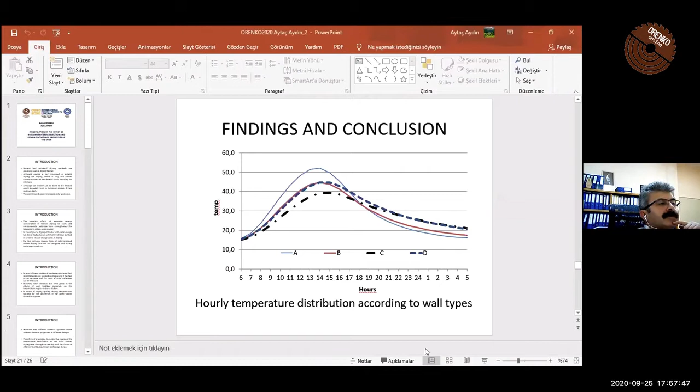Hi everybody. I have two papers. One of them is investigation of the effect of building material selection and design on thermal properties of the oven.

Natural and technical drying methods are generally used in drying timber. Although energy is not consumed in natural drying, the drying period is long and timber cannot be dried to the desired result humidity for interiors. Although the lumber can be dried to the desired result humidity level in technical drying, costs are high. The energy used causes environmental problems.

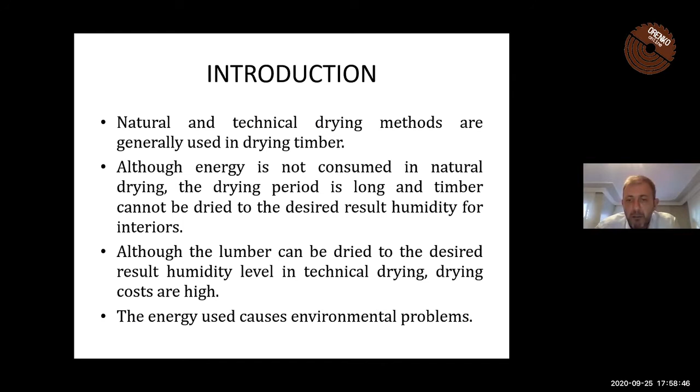The negative effects of intensive energy consumption in timber drying on cost and environmental pollution have strengthened the tendency to utilize solar energy. In recent years, drying of timber with solar energy has been studied as an alternative drying method in order to reduce energy costs in drying.

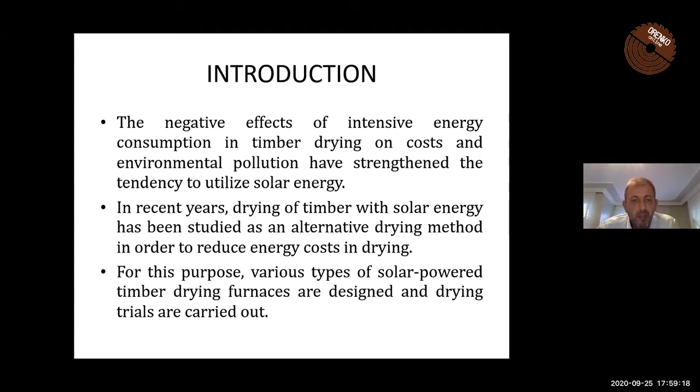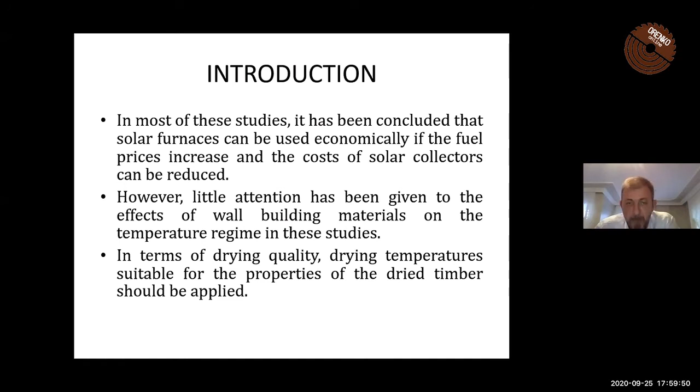For this purpose, various types of solar-powered timber drying furnaces are designed and drying trials are carried out. In most of these studies, it has been concluded that solar furnaces can be used economically if fuel prices increase and the cost of solar collectors can be reduced. However, little attention has been given to the effect of wall building materials on the temperature regime in these studies. In terms of drying quality, drying temperatures suitable for the properties of the dried timber should be applied. Materials with different thermal capacities create different thermal properties in different designs.

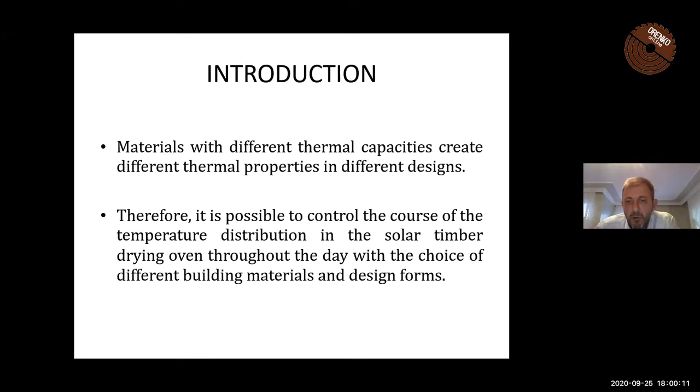Therefore, it is possible to control the course of the temperature distribution in the solar timber drying oven throughout the day with the choice of different building materials and design forms. In solar furnaces, the temperature varies according to solar energy values and shows significant differences throughout the day. During the sunbathing period, the temperature first rises, usually decreases after reaching the maximum value between 12 and 14. The width of the hourly temperature change interval negatively affects the drying time and quality.

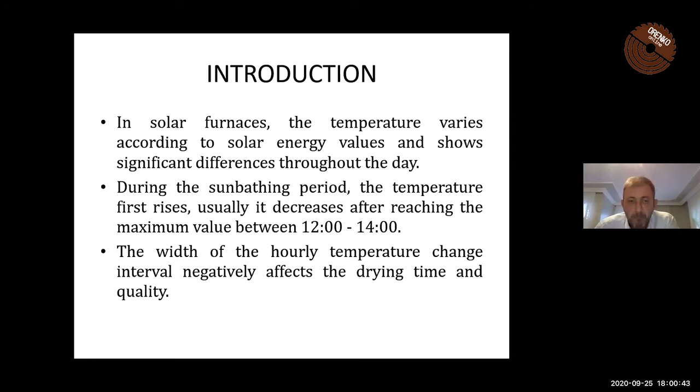The specific heat and heat conduction coefficients of the wall materials also have an important effect on the change of furnace temperature. Therefore, by choosing the wall building materials to be used, a more homogeneous distribution of the oven temperature can be reached.

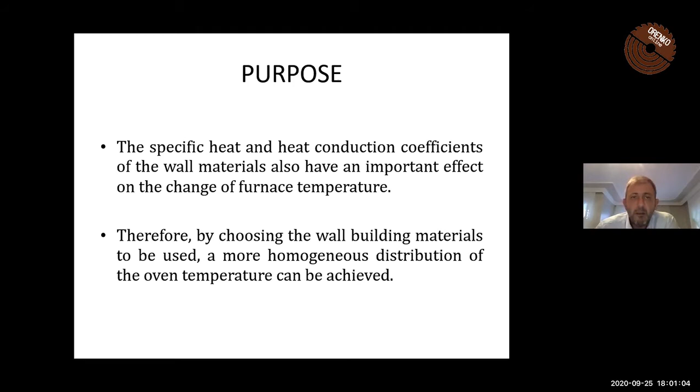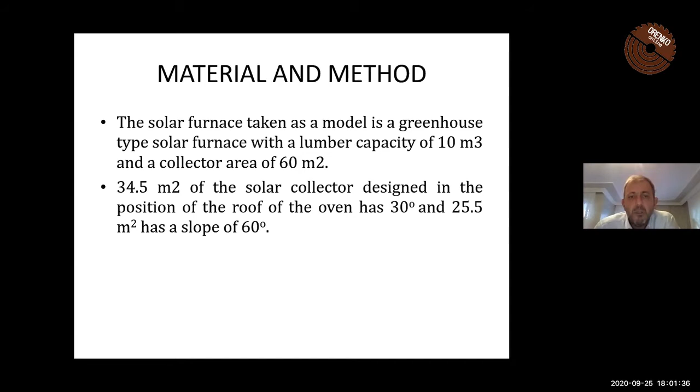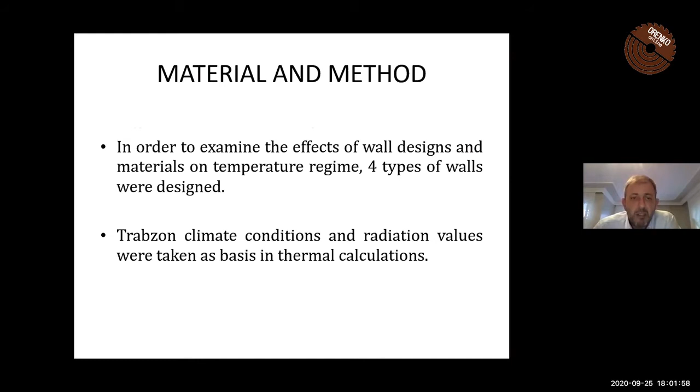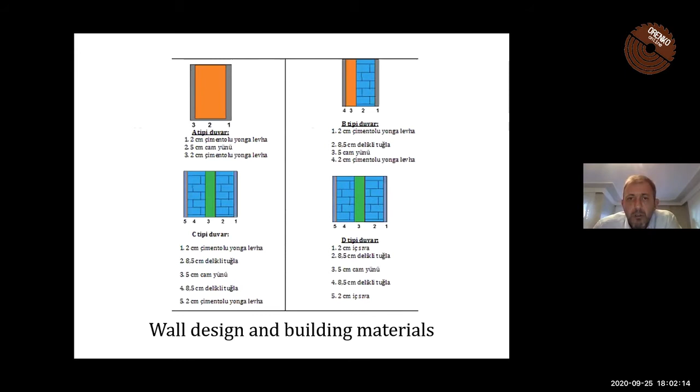In order to examine the effects of wall designs and materials on temperature regime, 4 types of walls were designed. Trabzon climate conditions and radiation values were taken as basis in thermal calculations. You can see from the slide wall design and building material types, 4 types can see. The furnace temperature was calculated using the thermal equilibrium equation.

The second is useful solar radiation entering the oven. Hourly solar radiation values coming to the collector surface are calculated from Trabzon's average irradiance values for many years and given in the table. For collector efficiency, 45% value is taken as basis.

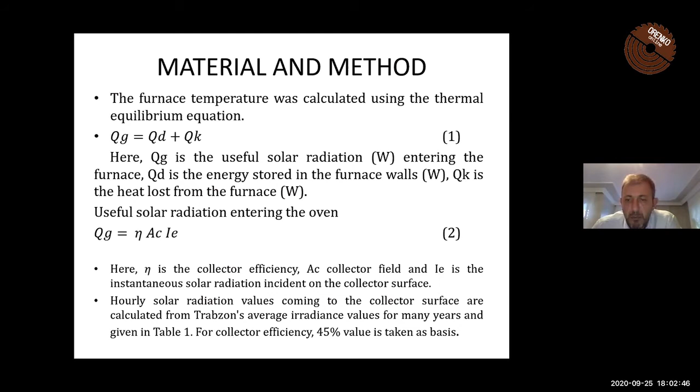You can see hourly solar radiation coming to the collector surface in Trabzon and monthly average values of outdoor temperature in the table.

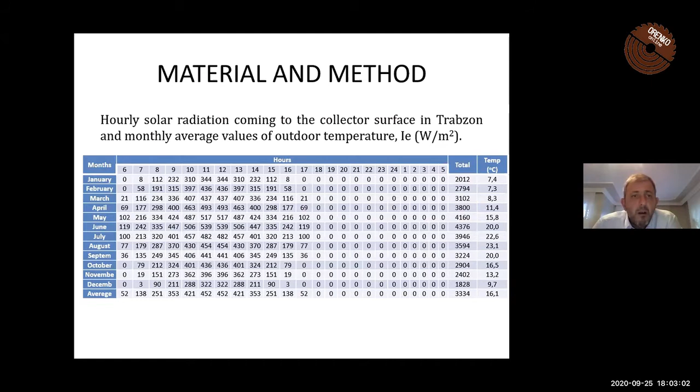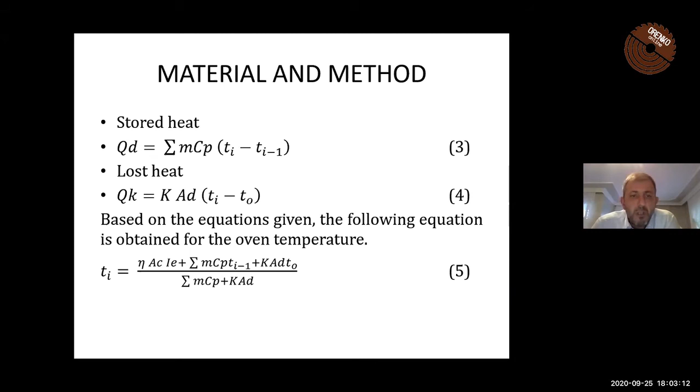Table stored heat, lost heat formulations are in the slide. Based on the equation given, the following equation is obtained for the oven temperature, and other wall types A, B, C, D formulation you can see.

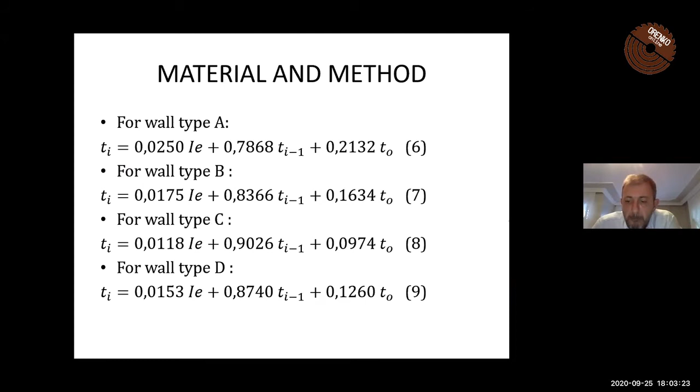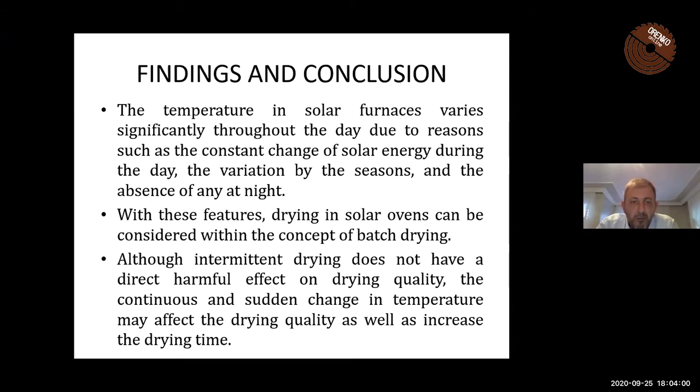Findings and conclusions: the temperature in solar furnaces varies significantly throughout the day due to reasons such as the constant change of solar energy during the day, the variation by seasons, and the absence of any at night. With these features, drying in solar ovens can be considered within the concept of batch drying. Although intermittent drying does not have a direct harmful effect on drying quality, continuous and sudden change in temperature may affect the drying quality as well as increase the drying time.

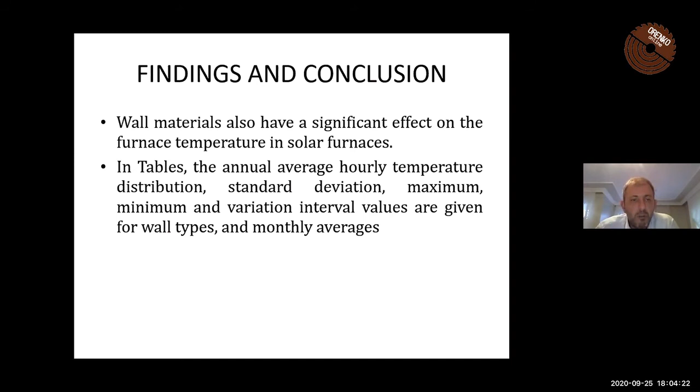Wall materials also have a significant effect on the furnace temperature in solar furnaces. In the tables, the annual average hourly temperature distribution, standard deviation, maximum, minimum, and variation interval values are given for wall types and monthly average. Monthly temperature average and standard deviation values of furnace types are also in the table.

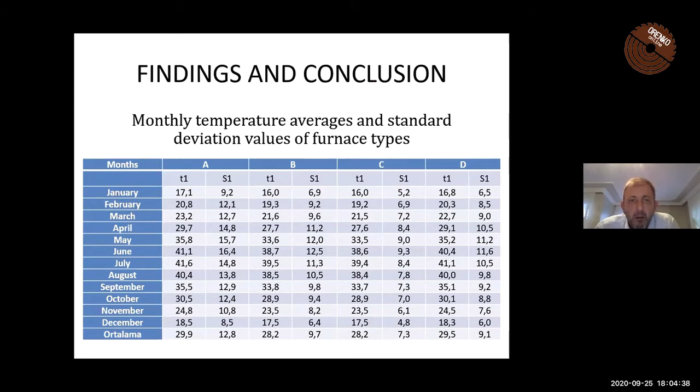Average oven temperature has the highest value in A-type oven and the lowest in C-type oven. In A-type oven, the highest value of the average oven temperature during the day occurred in July with 41 centigrade degrees, and the lowest value occurred in January with 17 centigrade degrees. The same values in B, C, and D type furnaces you can see.

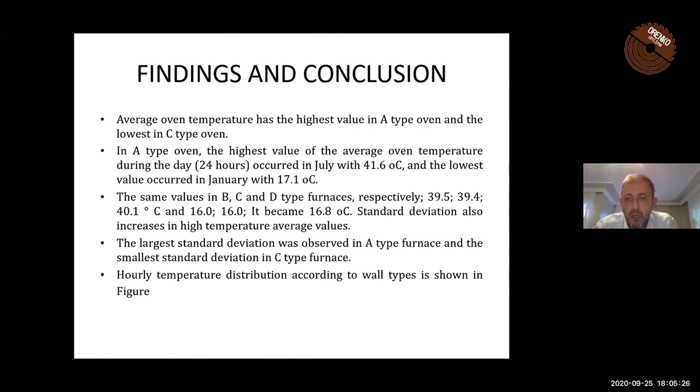Standard deviation also increased in high temperature average values. The largest standard deviation was observed in A-type furnace and the smallest standard deviation in C-type furnace. Hourly temperature distribution according to wall types is shown in the figure.

These materials with high thermal capacity will store a lot of heat. In furnaces, despite the low temperatures that occur in the oven during the sunbathing period, the temperature drop is less after the end of sunbathing and at night. In furnaces built of materials with low thermal capacity, the temperature of the furnace, which is higher during the sunbathing period, drops greater at night.

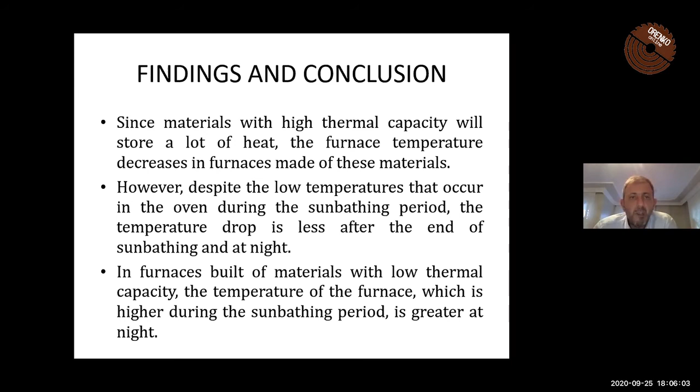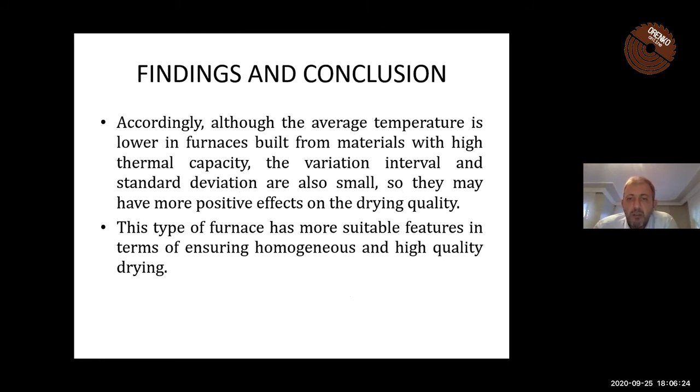Accordingly, although the average temperature is lower in furnaces built from materials with high thermal capacity, the variation interval and standard deviation are also small, so they may have a more positive effect on drying quality. This type of furnace has more suitable features in terms of ensuring homogeneous and high quality drying. In solar systems where high temperatures are desired during the sunshine period, the selection of low thermal capacity building materials can be recommended. However, it will be beneficial to use material with higher thermal capacity in solar furnaces where activity is desired throughout the day.

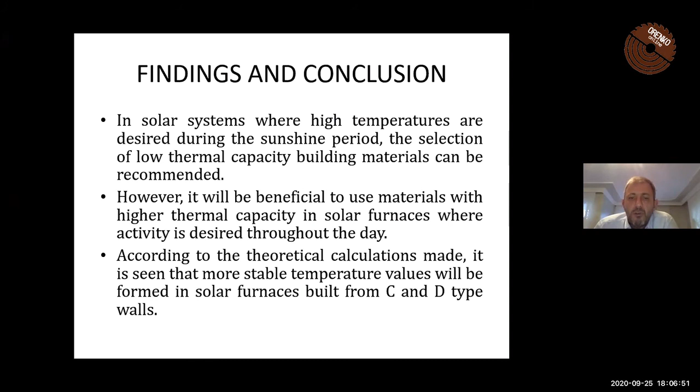According to the theoretical calculations made, it's seen that more stable temperature values will be formed in solar furnaces built from C and D type walls. In solar furnaces, thermal insulation thickness of 5 cm is taken as basis instead of the 8 cm thermal insulation thickness recommended in the literature, since the heat losses caused by air renewal are more effective than the thermal conductivity of wall materials.

For the same reasons, it is possible to use polyurethane or styrofoam for thermal insulation. The effect of thermal capacity on temperature can be changed by making the thermal insulation close to or far from the inner surface. Thanks for listening.